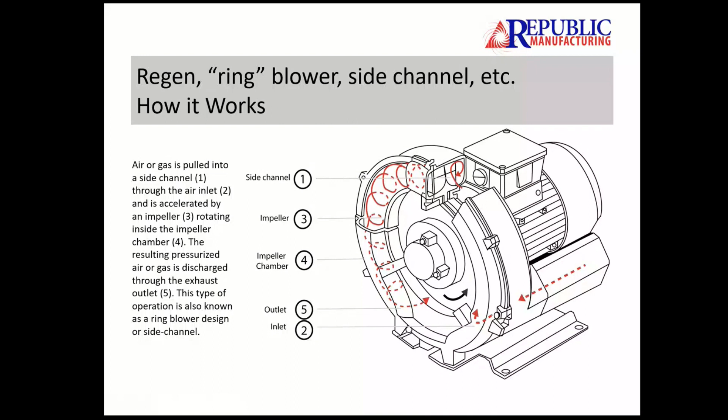Here we've got the normal TES kind of setup. There are 3 different blower sizes, but all come with the same standard inlet filter canister set at a 90-degree angle, so you're not dropping powder down into the pump for filter changes.

Most of the time, you guys are using a pre-filter, this fabric or sock filter that comes from TES, but this is generally the setup you're looking at, which is just 2 of those stages we just looked at in that cutaway. So you have a first and second stage, but just 2 impellers doing the same thing that we just looked at.

The other type of vacuum pump that TES offers on their machines is a dry claw. Very similar internal tolerances, very tight tolerances inside that claw. If you're familiar with a supercharger or a roots blower, the claw profile takes that dual lobe profile, adds the clawed tips, and gives these vacuum pumps the ability to reach about 24 inches of mercury at sea level.

But again, dry and contactless, everything's tight inside that chamber, but the introduction of any kind of particulate, especially something that's sticky, is going to tighten up those tolerances, increase the internal temperatures within the pump, and eventually cause failure. So that's pretty much how these pumps work.

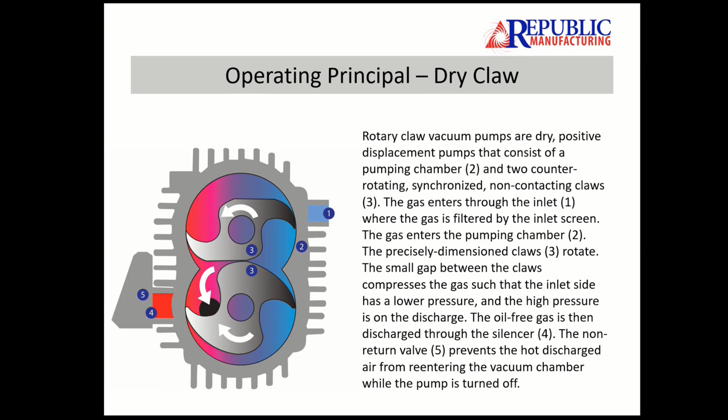Here's our standard inlet filter canister, rated for 175 CFM. The paper element is rated for 5 micron.

That CFM rating is important because we want to be above the open flow CFM of the pumps themselves. Looking at all the regen blower performance flow, we're at 3 times the open flow of the 420, double the open flow of the 520, and a good deal over the open flow of the 620, as well as the claw pumps, the 120 and 160. That's important because you're adding capacity to the filter.

What we deal with after that is controlling the amount of powder or particulate making its way to this filter, and we're going to continue to discuss that.

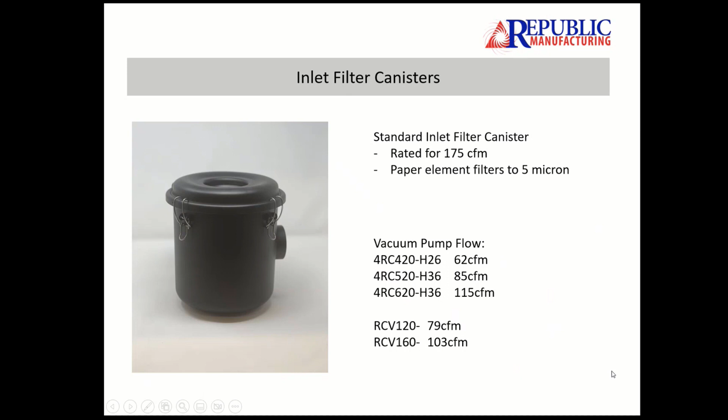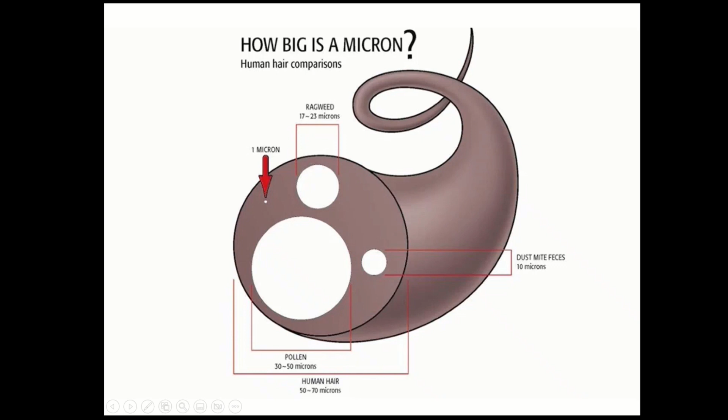We say 5 micron, and I want to make sure people are clear on how tight a 5 micron filter is. What you're looking at here is a cutaway of a human hair. 50 to 70 micron is the width of a human hair. You can see some other cutaways: pollen, ragweed, dust mite feces, which is pretty unpleasant. This little dot on the face of the hair cutaway is a micron. So 5 of those is the filtration level of these filters when they're in good working order, with no holes or tears. Nothing within production should be smaller than 5 micron, though the finest dust could maybe get through, but that gives you an idea of what we're talking about with 5 micron.

If that seal is damaged, you're going to get an introduction of product through the filter, right into the machine. The filter elements themselves, whether caged style with cork gaskets on top and bottom, or open style with rubber gaskets on top and bottom, it's very important that those gaskets remain installed. I've seen situations where the gasket falls off or has been used too many times and there's nothing there. Every one of these seals, from the seal at the bottom of the canister, to the seals on top and bottom of the filter elements, to the O-ring around the lid of the canister, needs to be tight and installed properly, or you'll have a path of least resistance for particulate to make its way into the pump.

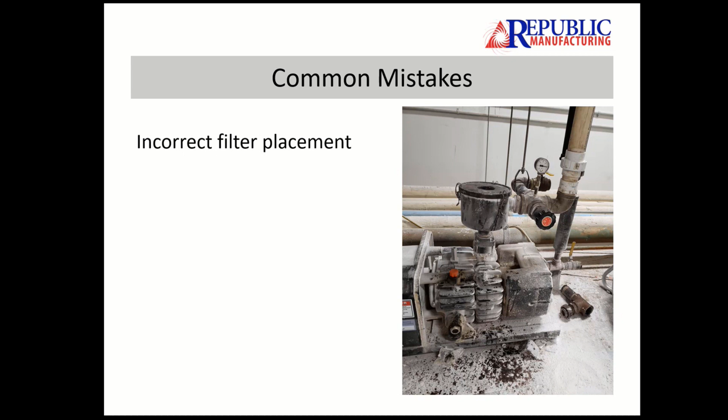We're going to talk a little bit about the filtration programs we've done with other people, about what you're doing when inspecting these filters and how to clean them. I just wanted to put a plug in there - at some point, you just throw them away.

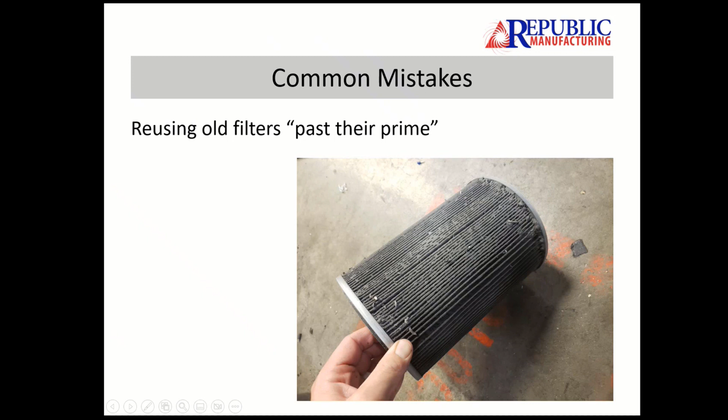Going back to the various components in the filter canisters and housings themselves, if you have a gasket that's worn or has taken on so much product that it becomes brittle or hardened, you're not going to get the nice sealing effect that you want.

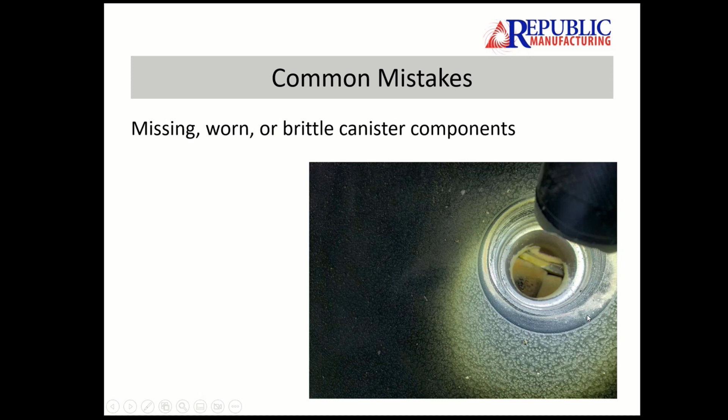Excess powder in the canister - we're going to talk about different things that can be done to mitigate the amount of powder making its way to the pumps, but this is why you have the filter set at a 90 degree angle. Every time you put in a new element, you want to remove as much of this powder from the canister as possible. When this pump turns back on, if a filter is just thrown back into this canister, the flow is going to kick up that dust and pull it right up into the filter, and you're going to get a lot less usable runtime out of the filter if you leave any of this particulate in the canister itself. So take your time, swipe out as much of that powder as possible. Even pulling out your gasket or seal and reestablishing that seal between the canister and that butterfly seal makes a big difference.

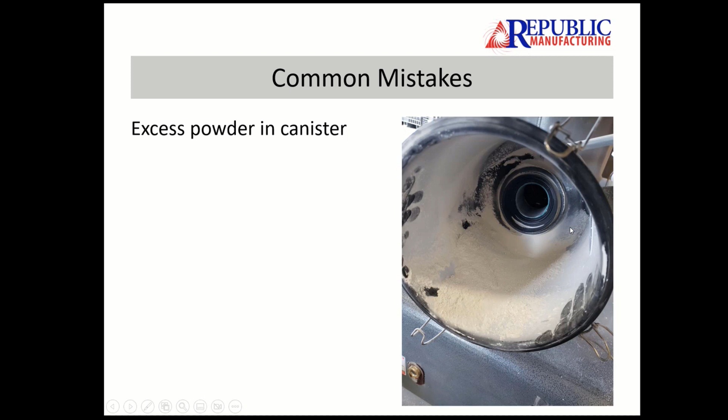So as far as cleaning the filters, this is probably the best time to discuss that. You want to clean the filters with compressed air through a gun or a nozzle. You're not going to want to put 120 psi directly into that filter.

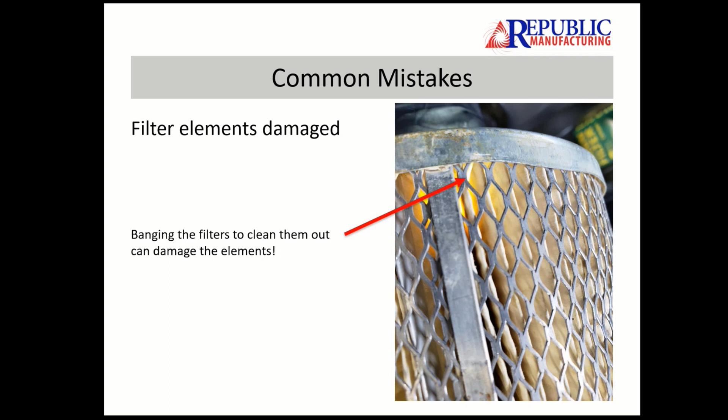Going into past facilities and the success we've had implementing a filtration program, I did a quick write-up on what we've done: cleaning the filter elements only with compressed air from the inside out, and thorough inspection of the filter elements after cleaning.

Generally I try to pull that inspection away from production and into the maintenance team, or have one or two people within that team in charge of inspecting the filters, so that when there's a tear or a filter that's gotten beyond its useful life, those are discarded and new or inspected elements made available for production. Maintenance providing those pre-inspected elements means there's no question on production's part about what elements are usable, what's good or bad.

What we've found is that as facilities have a lot of usable elements within their maintenance parts room, they're able to minimize the amount of product passing through the filters.

Regular inspection of all the canister components and seals, adding that into a weekly or as-often-as-makes-sense routine. If you add that into your normal maintenance of the pumps or various parts of the encapsulator, you can catch a bad seal, a bad clamp, something that's not quite right. Having that as part of your regular maintenance definitely makes a big difference.

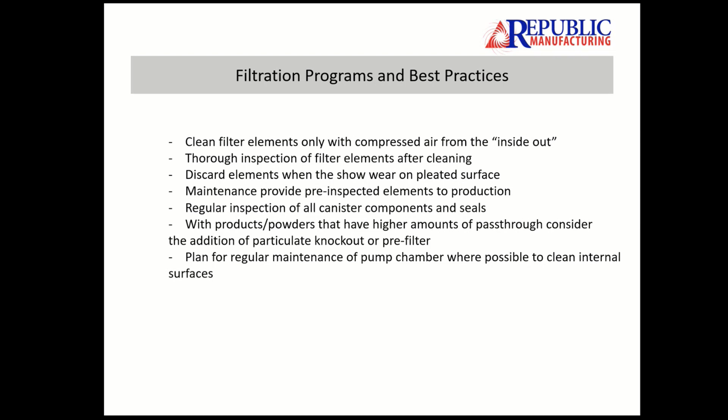No filter is going to be perfect. Production and maintenance are going to have some powder go by, and sometimes just getting in there regularly, cleaning out the claws, and having a fresh start before any catastrophic failure takes place is good practice.

Something I've talked about with Rob and the team at TES is the possible addition of a cyclone separator to try and catch more particulate if they can. There's a lot on the market — as simple as plastic cyclones on top of buckets, and as intricate as larger cyclones attached to 55-gallon drums, and they do a good job knocking out that particulate.

Anything you can do to keep powder from getting to that filter and causing multiple filter changes throughout a shift helps. The other option we see in some facilities is the addition of larger filter canisters — inline, anything rated to 5 micron, you can put in a T-style filter.

These T-style filters with a bucket, even the polyethylene see-through bucket, can give you a visual representation of where you're at as far as the powder coming through. They can be helpful installed in line before a central system or each of your individual pumps.

The other thing we've done, which is in place at some TES customer facilities, is having a filter at the encapsulator and a filter at the vacuum pump. The filter at the encapsulator is overseen by production with elements provided by maintenance, while the filter at the vacuum pump is overseen just by the maintenance team. By separating those duties for inspecting and taking care of filtration, it gives a second layer of protection for the pumps by having both maintenance and production overseeing those.

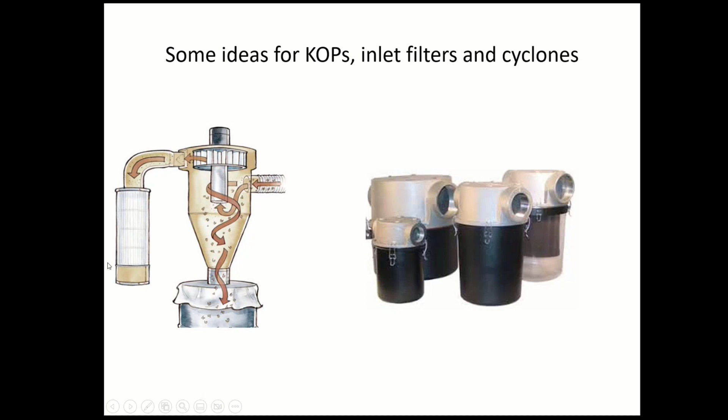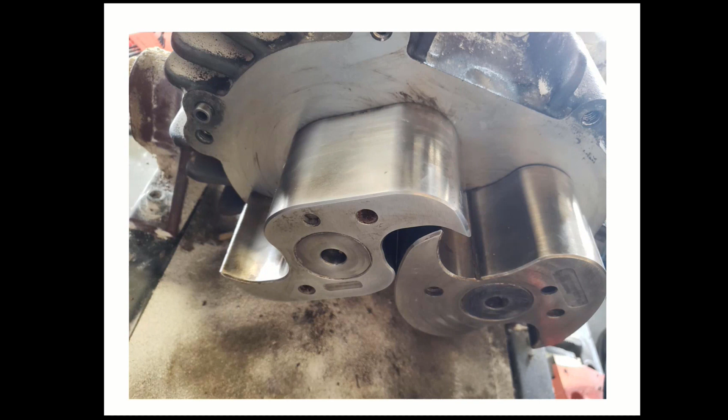Got the pump pulled down to this point, and with some warm water, a spray bottle, some scrapers, and a little elbow grease, you're able to return that pump to clean, brand new, ready to be reassembled. You're talking about a couple dozen bolts to get to this point, and some time. The best thing we've found with the products generally coming out of these encapsulators is a little warm water and scrapers.

A thin shim can be used to clean out behind the claws themselves, but it's about adding time to get into these chambers and clean them on a regular basis. I have one facility doing every pump once a quarter, and another doing every pump twice a year. These were facilities that were sending pumps in for a rebuild sometimes once a month, and now we rarely see a rebuild-type failure out of those facilities by adding regular tear down and cleanup on their pumps.

That's all I've got for my presentation, but I wanted to open the floor to any questions or concerns. Again, Jared and Rob, the entire team there at TES, have my contact information. If there's anything you wanted to address directly, I'm here to help. Does anyone have any questions over what we went through here?

On the canisters—because we got them installed going upright, we assumed that's how they went—you're saying to put it at 90 degrees, so we can just change it? It doesn't matter which way we're pulling through that filter; in this case we'll be pulling through the center as opposed to the outside of it. You want to pull through the center, using the center of the canister as the discharge. The best way to do that is just to get a 90 pipe fitting. If you've got to raise it up with a nipple, you can raise it so it clears the body of the pump, but you definitely want to be pulling from the center of the filter into the pump. It just increases the surface area of the filter. The 5 micron filtration will work either way, but the surface area of that filter element is maximized if you're pulling through the center of the filter.